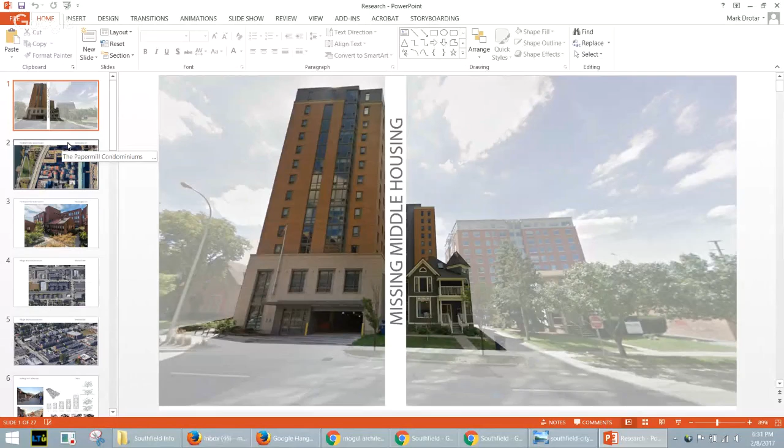I don't even know really where to start, but I guess kind of recapping some of the other stuff I've done. I was trying to put stuff together for Monday, to really organize my thoughts, because I feel like I've been all over the place.

I enjoy your modesty, and I love the soft sell you create for yourself. But Mark, you're actually a pretty clear thinker. I think you have that more Southern way of talking, slow and engaging in terms of cadence, but your thoughts are actually very intelligent. They have a lot of pulp to them, a lot of humanity to them. So if that gives you a little more self-assurance, maybe that's the aim. But I also enjoy listening to you talk about your work, so I don't mind the confusion, but you can't hide behind that forever.

No, and that's where I feel like I'm a slow starter. Yeah, me too, quite honestly, I'm the same way. Because I've seen your work - that's one of the things I valued about inviting you all to talk about your work, and you had a lovely project last year. So that kind of coherence and organization is what I expect from you now.

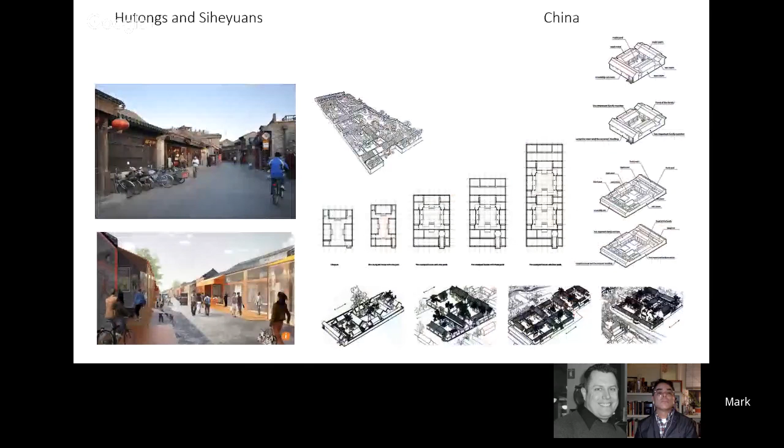From last week, some of the things I looked at were the Papermill Condominiums in Washington, D.C., Village Drive condominiums in Dearborn, and the Hutongs and Siheyuan in China. Good stuff there.

It got me thinking, both with Dearborn and with these, about the use - who's actually going to use these things. And I started to steer towards, in my mind, families in a sense. That's kind of what was in my mind as I was doing this last week.

Just to give you some location, it's in Southfield, located between the 696 and the Lodge Freeway, that corner. Just some aerial shots.

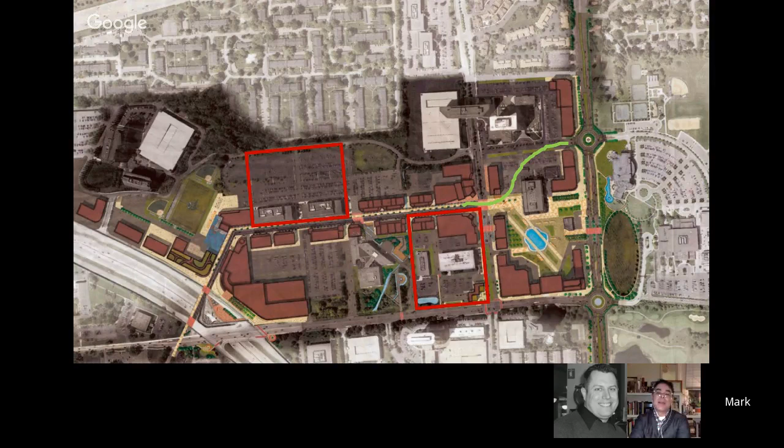Exactly, that's actually why I think this layout was interesting and compelling when it was done. But the whole sensibility, the current best practices about urban planning strategies in neighborhoods like this has changed, and that's why this will never go.

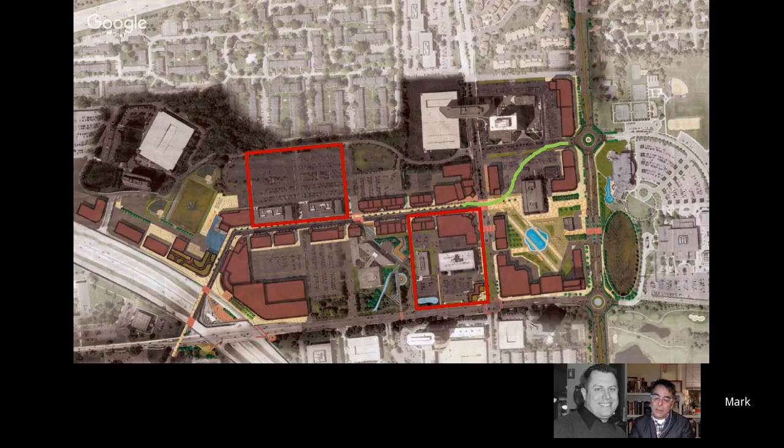Well, I don't mean to derail the conversation, but now I'm thinking of, I'm going to say Dearborn again, but not the neighborhood we visited, and maybe not Dearborn at all, but maybe Southfield. And I'm saying this because of your remark about maybe I'm not doing a design at all, which on point is interesting to me, because maybe you're right.

Maybe it's actually, maybe you actually craft a prism through which the content of this polyfamily is projected through, and the colors of that content are configured on that block that you have in Constance's plan.

And then you get a different prism, and you shine that content of the polyfamily into a current neighborhood somewhere in Southfield, and start to look at what you would have to do to those single family houses, the driveways, the garages, in a way to recast those products of obvious suburbanism and suburbia, and make them something that could accommodate the polyfamily, in such a way that two sisters or a brother and sister could live next door to each other.

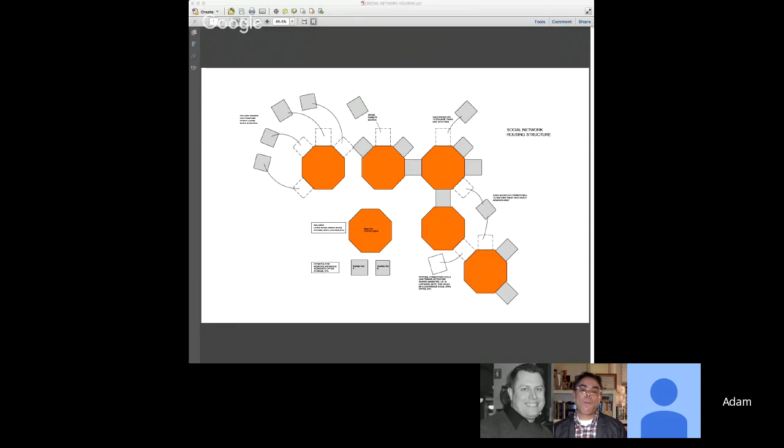Then I started to think about how, if you want to work vertically with this, it might begin to become a challenge to detach those different units if you were a second story up from there. So you need some kind of secondary structure.

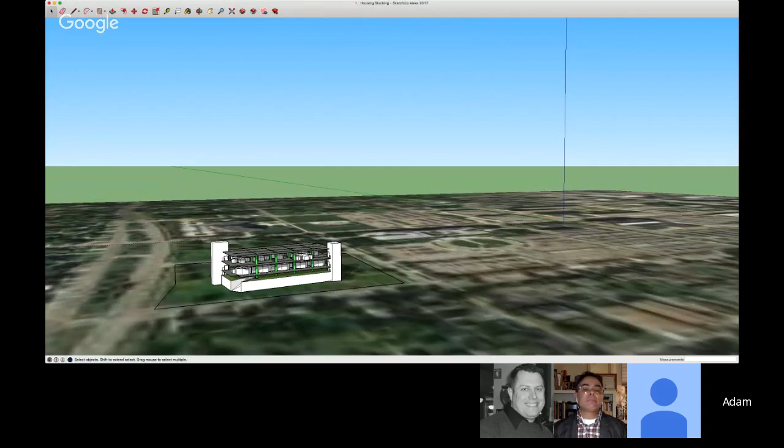I was looking at—just gotta adjust my screen one second—Corbusier's Dom-ino, or the Dom-ino house.

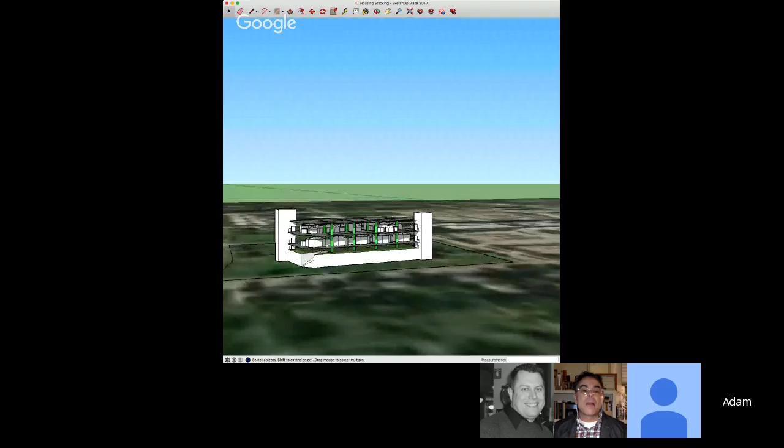Creating the free plan, like a carriage house and Unité d'Habitation with the common roofscape and different shared amenities between all the sites.

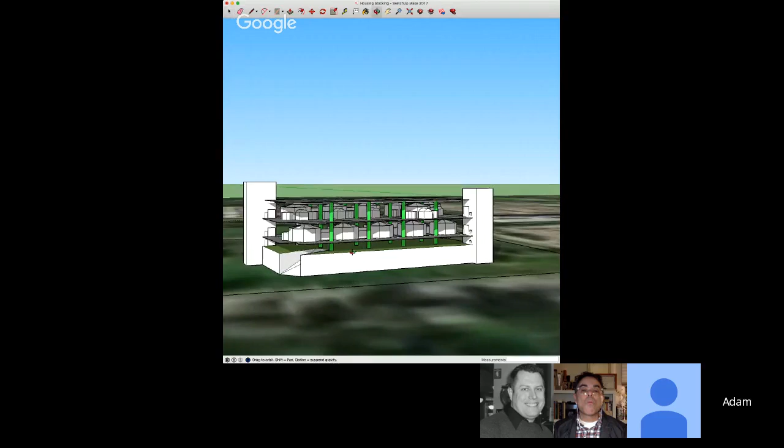So then if each layer becomes—you sort of create a scaffolding with that, so that at different levels you can begin to start plugging into the common utilities shared between all of them.

And then that scaffolding, the sort of—what do you call it—metal decking that you'd see on bridges and stuff, can allow that to be transparent, so you can still get light coming through and airflow still being maintained, rather than just like a concrete slab, a parking deck.

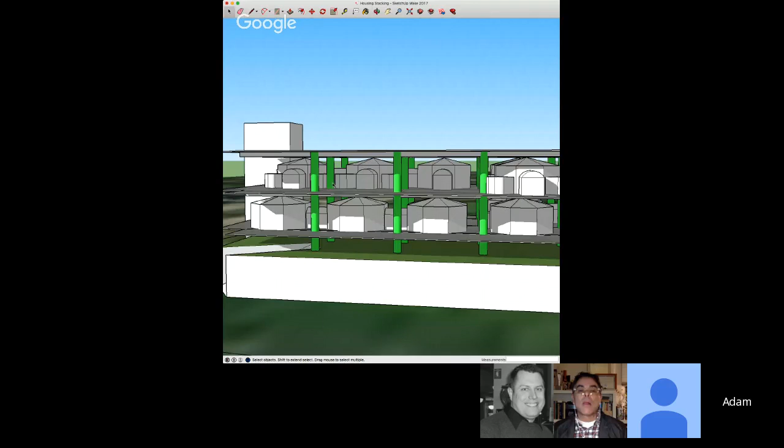But it does have the DNA of a parking deck, which is interesting, isn't it? Yeah, so that way people can park their units within this overall structure. And let's say you wanted to detach a unit—you could disassemble it, transport it down the freight elevator, and then reassemble it down below.

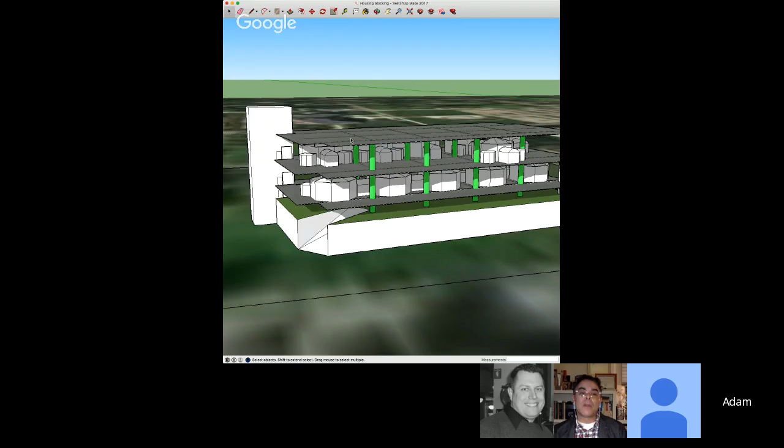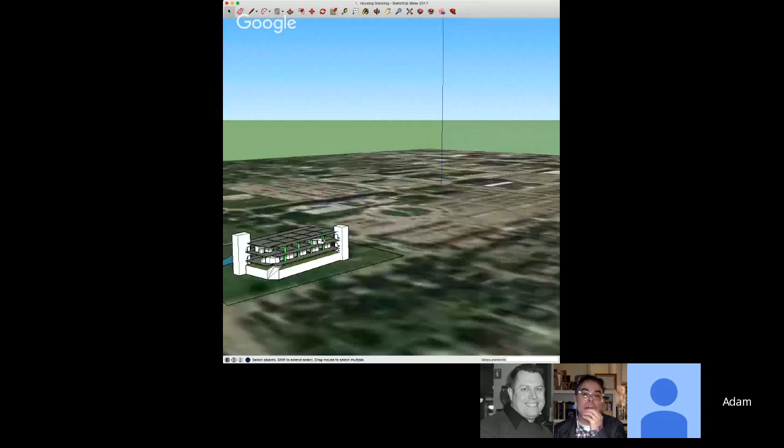Then I thought a little bit about how it'd sit on that site, using the southern fully open site. I didn't want to completely block off walking from the neighborhoods to the west to this historical museum, so I thought there could be a grand ramp coming up onto this second level, nicely landscaped, and a bridge coming down across the other side, connecting it over towards the museum to the northeast.

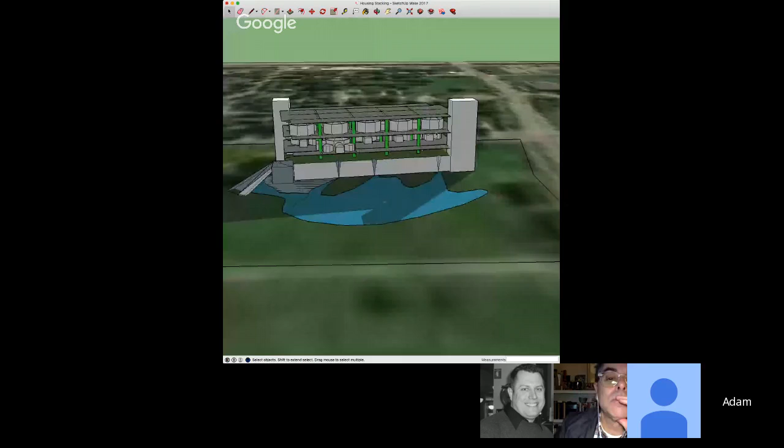Since this metal deck would have openings, water could start to drain through into the landscape area below and off the sides of the building into a sort of detention pond, to help store water on site and take care of the runoff.

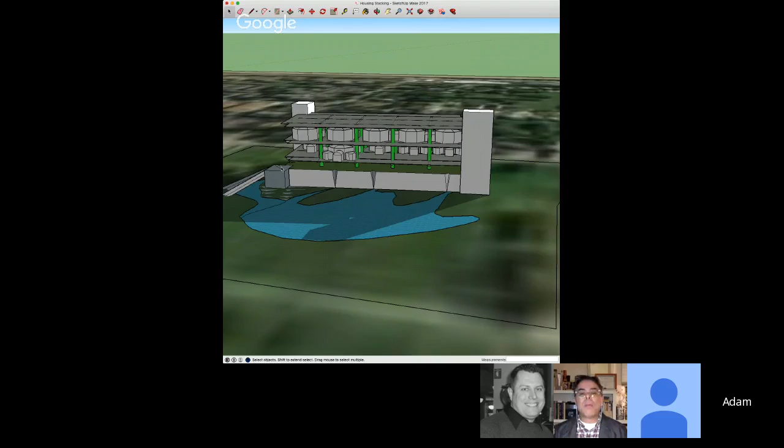So is this one unit deep, with public space on the back and front of each unit? Can we look at the plan of this thing? Maybe take the roof off. Oh, so maybe not—or no, it's two units deep, but I could adjust that to whatever it would need to be. I'm just trying to understand that.

So I'm looking at this thing and I think the genetics of the model are causing me to react to it urbanistically. Hear me out, because first of all I'm kind of intrigued with this thing—it's quirky and it's innovative. I've never seen anything like this, and yet, given the nod to the habitation units you've seen by Corbusier, by Corbu, it's all really, really interesting.

So I don't want to quash that idea, but like the Unité, right? The habitation units were bad urbanistically. So that's what you got to brace yourself for.

The first thing I'd say is that by putting this thing at an angle on the site, in the middle of the block, it doesn't really allow for things to be built up next to it, and it doesn't really help define the street more. You shouldn't be surprised about that. That's kind of baseline urbanism - hold to the street wall, make things normal in that sense. If it's on the corner, take advantage of the corner. If it's in the middle of the block, then it's maybe a little bit more modest. Those are the rules of the game.

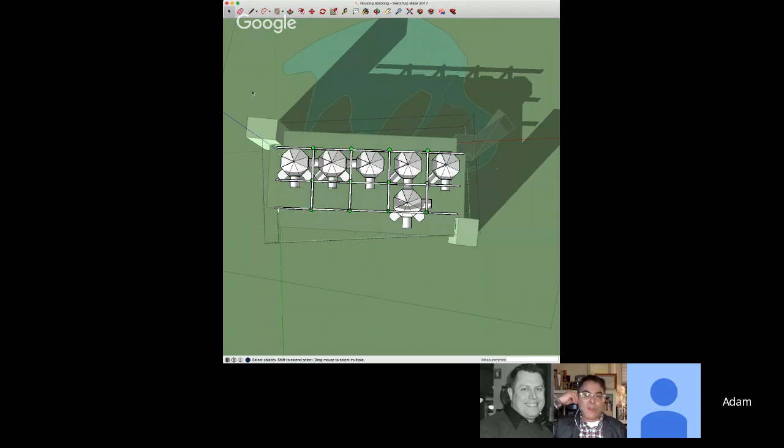Also, I think the thing could be much longer and could have its own configuration, like it could be L-shaped or T-shaped, and therefore be much larger than what you've shown. I don't know if you've thought about it urbanistically or programmatically to that extent, but that's probably coming next. And then it could fill up the whole block, or it could be a giant donut, and fill up the block.

And then the courtyard space in the middle could be a pond that everyone who lives there would enjoy. So if you thought about this thing as a digit, or like the bones in your spine, and you somehow took the model of that spine and just kinked it and kinked it and closed it onto that site, you would have that spine wrapping around all 4 streets, creating a courtyard.

Or maybe it's C-shaped, where the 2 legs run parallel to Martin Luther King, and then the other street - I can't remember what that was right now - it's open along, what is that, Kalamazoo? You know what I mean? So that's like another possible iteration.

So before you get too detailed in the architecture of this ark - because that's what it is, sort of - maybe just go back and think about density and urbanism as an opportunity to help unite this new thing into the neighborhood as responsibly as you can, based on your own experience with urban design strategies and based on what we're talking about tonight.

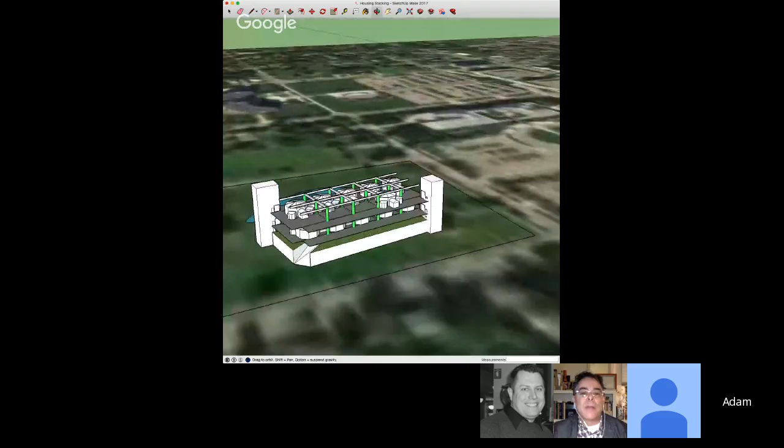The reason why the first floor was raised up was that maybe that first floor could start to either become - maybe there'd be some sort of live work opportunities going on here, or maybe you'd be able to provide some parking there. So this whole thing could be retail. Yeah.

So it's kind of a quirky thing in terms of maybe the way it looks, but it's also kind of familiar in terms of the way you're breathing life into it.

And I'm wondering if it makes sense for you to look at the piece by Corbu in Marseille, the Unité d'Habitation. Maybe look at the section of it, look at a typical plan, and look at the ground floor plan, look at the roof plan, because those elements are what makes that building important.

Also, kind of your idea of like, Billy's moving out, right? And so he's gonna pull the mini room in on a trailer to Kalamazoo College, and he's gonna plug it in there, for example.

That's cool. When you look at some of the design drawings, Adam, of the Unité, you're going to see Corbu talk about the Unité as a wine rack, where each apartment is kind of like a wine bottle - a vessel for living in.

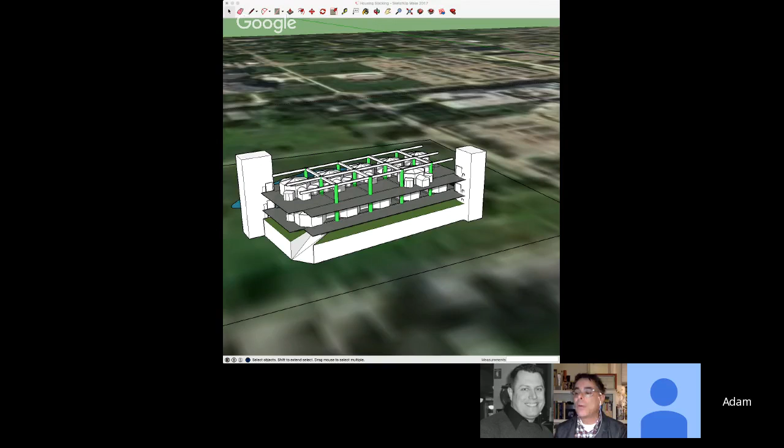But they're socialist housing, government housing, you have to know that, but they're very interesting. So going back to where's the architecture - can you close this for a second and open up your browser and type in, have you been to Paris? I've been to the airport, but no. Okay, that's a great airport, by the way. Yeah, it was pretty cool.

Save that, and then quit. And type in Pompidou Center. This is by Renzo Piano.

I think I got it. Maybe we can screen share that. You know this building? Recognize the name. Yeah, go ahead and click that article. So this is a collaboration in like 1969 by Renzo Piano and Sir Richard Rogers. This is a museum, okay.

Let's scroll through these. That's the Maison Domino plan, right, that open floor. And then the infrastructure is actually on the exterior. And the aesthetic is obviously playful, mechanical, but celebrated, right? The roof - and so you see it's this structural steel kind of vessel that allows for the transformation of interior spaces into multiple exhibit scenarios.

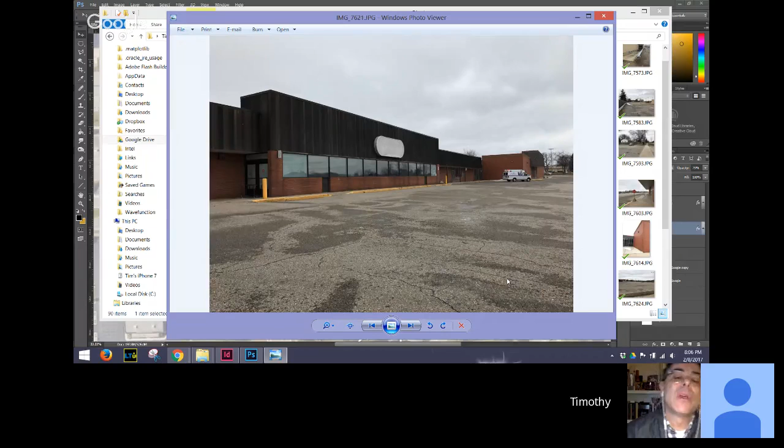I want to take you to a thing I did - not that what I did is good, although I definitely want to see your drawings. Go to West Bloomfield, Maple and Orchard Lake. Yeah, that's a good one. You saw the way we opened up the old Farmer Jack - was that the Plum Market one? Yeah, and made it a Plum Market, and we made it smaller, and we added retail onto it. So you're totally down with that.

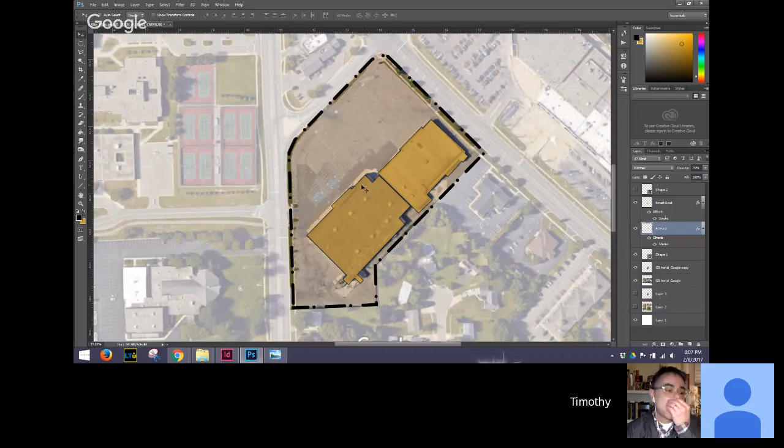Just to get my concept of operations, I guess. I've been looking at the numbers, playing with unit sizes, basically working in my sketchbook right now. The idea would be to program this in a way that part of it becomes for the community, part of it becomes the housing, and part of it becomes the program for the veterans. So I would end up doing something on the first floor, probably part of the Kmart, for the veteran services.

And then, it's shorter than I thought it was too - it's only about 16 foot to the top of the roof deck. But they have some tall parapets and mansards that make it look taller, to hide the RTUs. So being only 16 foot tall, I thought I might be able to sneak units inside, but I don't think so, so it'd be tough. You mean like a mezzanine? Yeah, right. So I think I'm going to end up having to try to build a number of units on the roof.

You could do that too. Of 20 to 30 units is what I'm thinking. Have you drawn that up, have you laid that out? Not in the computer, no. I'm playing with a number of different typologies in my sketchbook.

A couple other things I wanted to show you - I did a lot of digging over the last weekend of typologies for big box reuse. It's actually quite a huge issue, and becoming a bigger issue, these vacant big boxes. What's happening across the country is the Walmarts, the Kmarts, all these places are abandoning their stores wherever they are and leapfrogging over those to the next sprawling area, rebuilding and abandoning the old one because it's cheap.

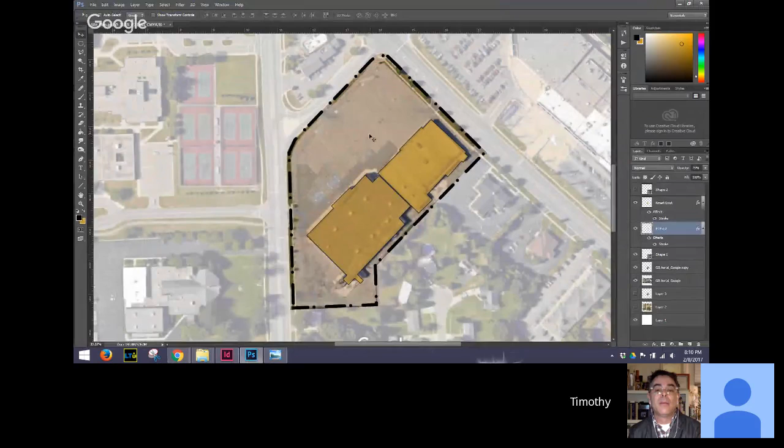Going back to my site plan, on my initial concept for the COAD assignment, I was looking at this, very roughly. The more I looked at the typologies for repairing this urban sprawl damage, the more I came across trying to take these parking lots and rehabilitate them to line the street fronts, kind of like what you did on the Plum Market site where you had the buildings at the corner with retail. So I was hoping to program that into the overall master plan, even though I may not develop it.

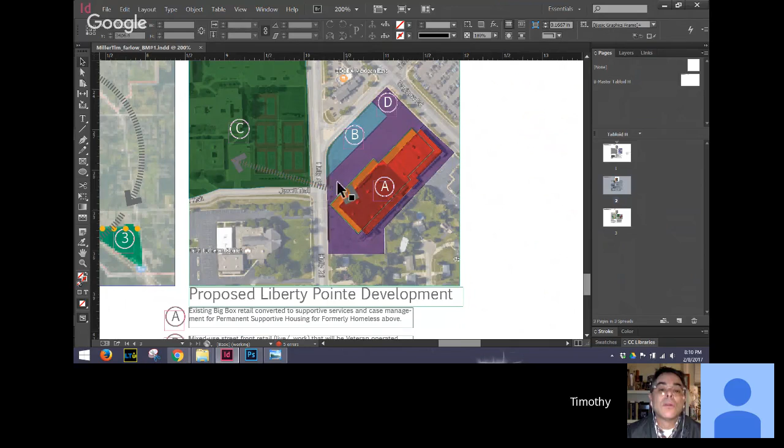So what is B? Is that a mixed-use building? Yes, it would be mixed-use street retail, live-work possibly, or something along those lines. It could have, in effect, two fronts—one on the diagonal street and one facing the Kmart.

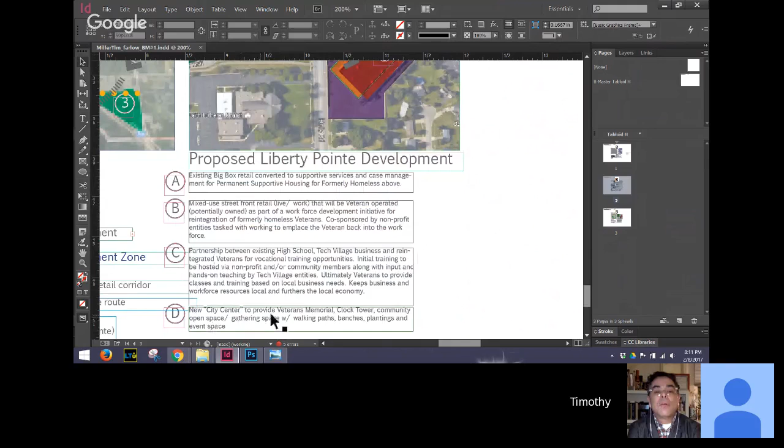What's D? I was looking at it being part of more of a community city center. Could be like a jewel box? Yeah, a clock tower—something highly visible, potentially iconographic. What's kind of funny is, if you look at this, I took some photos of downtown too, and this is kind of what our current downtown center is. Nothing crazy—this right here is our city center clock tower. I would like to take this and essentially move it to that corner and develop that corner better.

Ellen Dunham Jones talks about how some malls and strip centers are becoming the new town squares. Yeah, I watched her TED Talk after you recommended it last time, and it really inspired me how she talked about a shopping mall that was turned into an artist's studio. She talked about how some are being developed into this, some into that.

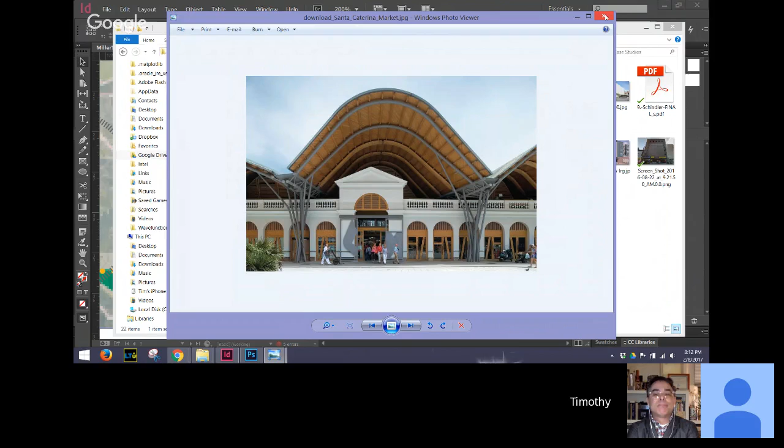That got me searching around, and I found a bunch of different case studies talking about turning malls into a market. This was one of those—this is Enric Miralles. I think it's in Barcelona, but this is amazing, I really thought it was cool. One of the other ones I thought was really, really neat—that was the one you showed me.

Randy Brown, adaptive reuse—this one absolutely blew my mind. Looking at this, you're like, wow, this is a really cool library. Well, it started off as a Walmart. Seriously, it's in McAllen, Texas. It started off as a vacant Walmart—that's what it looked like. Here's a construction photo, and here's that entrance after it was developed.

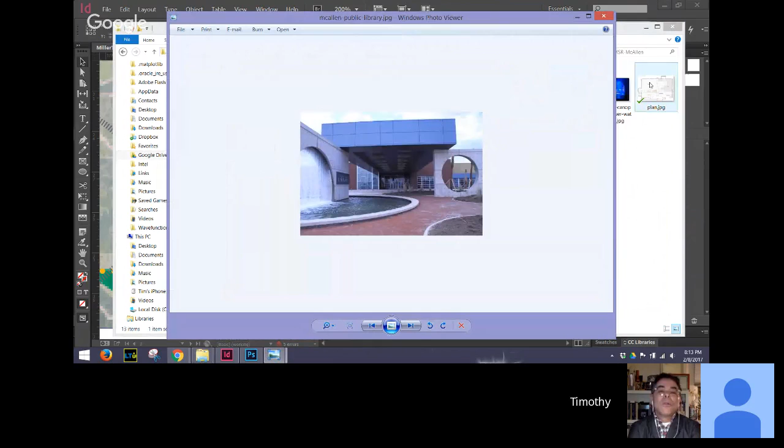So let's go to Google Earth to McAllen, Texas, right now. This is the way I like to work—look at it, take a screenshot, bring it into AutoCAD at the scale of your site, and test it. What did they do? Apply the case study.

That makes perfect sense. I'm with you. So there it is—I can still see the old parking lot, I can still see the loading dock. Let me open this real quick—so that's the plan.

Their issue, from what I read in the case study, was that Walmart has these really, really tall ceilings, and they had to figure out how to program this into a library in a one-story space—which actually ends up being the largest one-story library in the U.S. They had to bring down the ceiling, bring down the spaces, to make it look like a library and not a converted Walmart.

That's easy, though, I think. I think that's a fun challenge. It was, and it came out really, really cool.

If you just look at the DNA of this site, it's got outlots - the PCS dealer, Cricket Wireless, and the burger joint. It's got the parking lot, which has been reduced because the load is different, and it's privileged some of that reduction to community space. It's tried to connect it with the neighborhood by walking paths. It looks better in the pictures than it does in the aerial - in the aerial, it still smells like a Walmart or whatever it was. But yeah, this is what we're talking about.

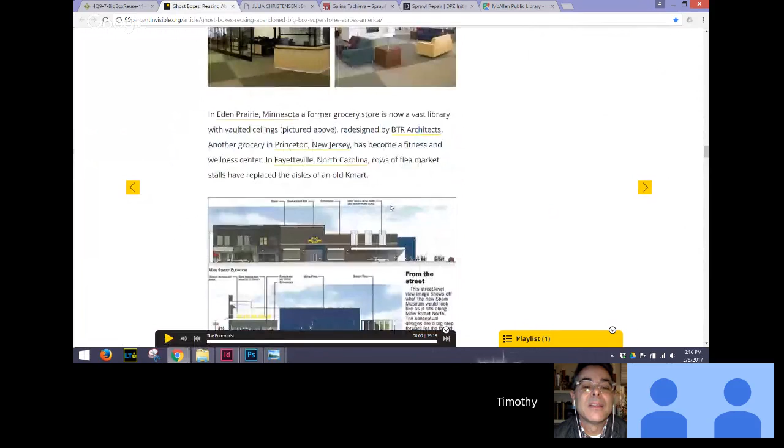Austin, Minnesota - they transformed a former Walmart into the Hormel Spam Museum, which is kind of interesting.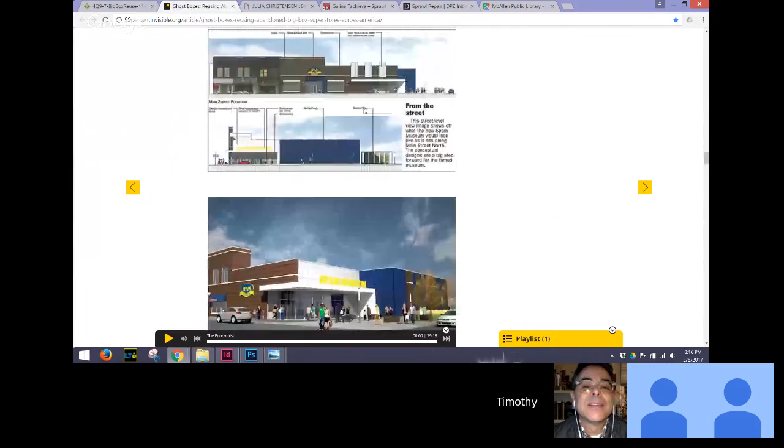There's another one that they transformed into an indoor go-kart arena - nothing special, but it's interesting. Yeah, a family center. So I started looking at a lot of this, and it's really given me a lot of hope.

This is what we were talking about last time - you had the big box on the left. What I said when I showed you the Lake Flato stuff was that maybe you cut things open, maybe you rip the roof off, maybe you peel back the skin, and end up producing something that's actually the aggregate of lots of small things that don't belie the genetics, the heritage of the original big box. That's a perfect section drawing down below.

That one really hit me too - it really started making me think when I did my site study. When I walked out there, there's a couple different points on the building that would allow you to cut through the backside, like here. This would allow you to cut a swath through the building to create sort of this community space walkway. And then it actually links up to the front in this area right here where the former garden department used to be, so it makes a lot of sense.

You could do something along the lines of stripping this canopy down to the bare steel and doing some... or rip it off. Or do something completely different. Maybe you leave the steel and it becomes part of this.

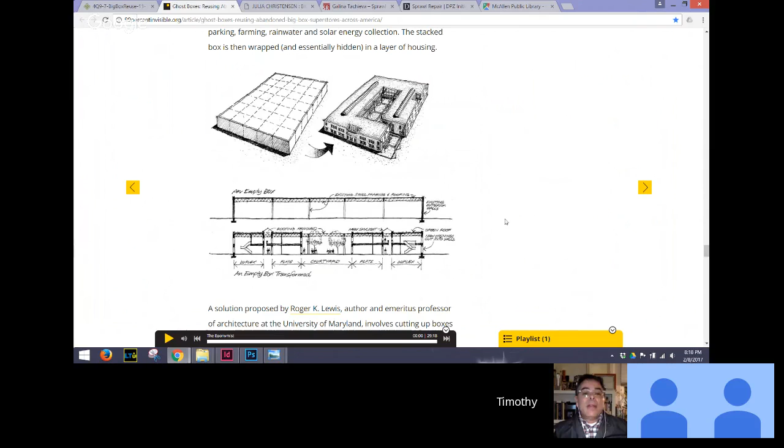I think what you have to feel comfortable with is using the steel and the footprint, but don't be limited by any of those. You don't even have to be limited by the roof - the roof can be cut and the steel can be extended up to create higher volume spaces, like where those skylights are. They just cut holes in the roof, but what if you extended walls up to make a much larger volume, bigger than the skylight itself? Like what if that courtyard roof where you see the trusses - you could leave the trusses there, but extend walls like clerestory walls up above that and have architecture and spaces there as well, looking into that courtyard. So don't be limited by anything other than where the columns are, and you can still work with that.

I would agree. I appreciate it. So I started more and more - look at that, that's an interesting drawing.

This girl - I don't know if you're familiar with her, Galina Tachieva - she's got this idea of sprawl repair, she calls it. She's worked with a firm, DPZ Architects - that's Duany Plater-Zyberk, Andrés Duany's firm. I started looking at their work, and he's the guy I told you to listen to his 10 lectures from the AIA conference down in San Antonio - it gives you the entire history of urban form.

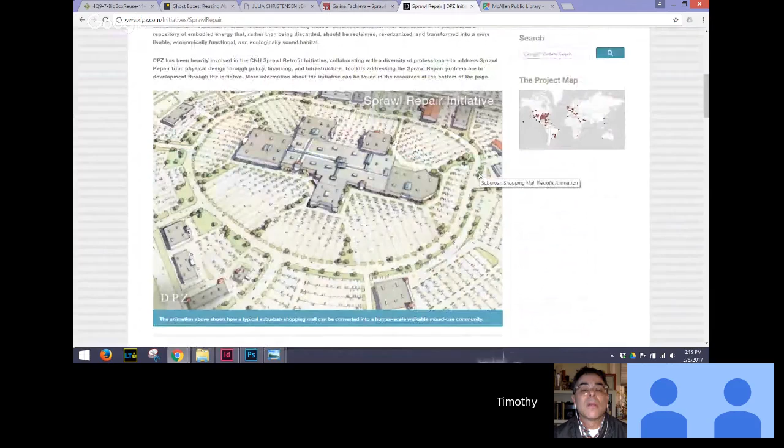Okay, so that's a great pair of drawings. He has a bunch of them. And it's funny, they classify it as many different things. They have the shopping mall. How do you transform the shopping mall? It transforms into something like that. I had a student from Columbus that took on one of these and tried that.

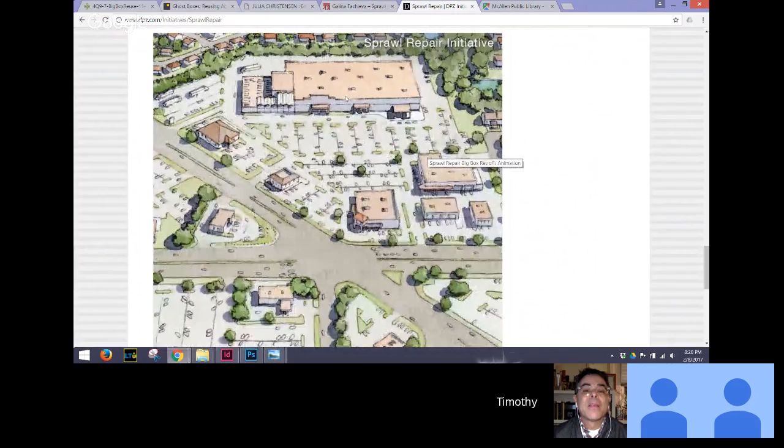Okay, so this is your condition. Yes, exactly. So that's where I was getting at, maybe I can program from a site master plan standpoint, something along the road to help reduce the parking and bring back the urbanism to this site. But then I can also start adapting the big box itself and then focus on the residential portion of the big box. Right, right. So that's kind of where I've been.

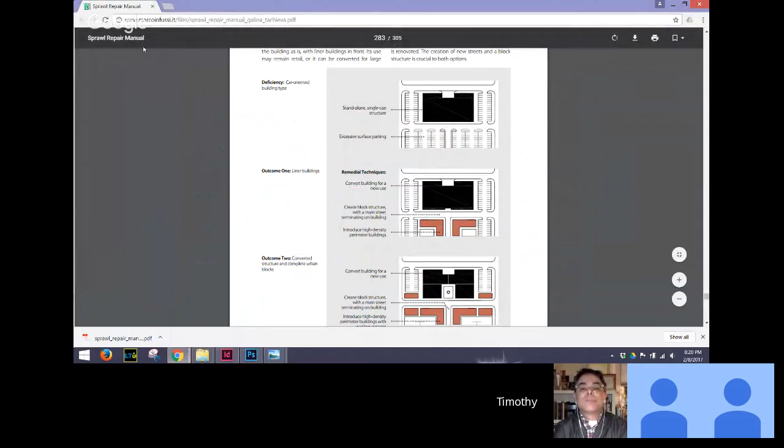So let's go back to Galina's thing there for a second. Oh yeah, let's look at this too. So I downloaded her Sprawl Repair Manual, she calls it. And she goes through the different case studies where you can repair sprawl on the regional level, the neighborhood, the big box, the building level. So this is just some of her typologies and suggestions for the big box repair.

Yeah, so you're kind of a blend between outcome 1 and outcome 2. Right, that's right, exactly.

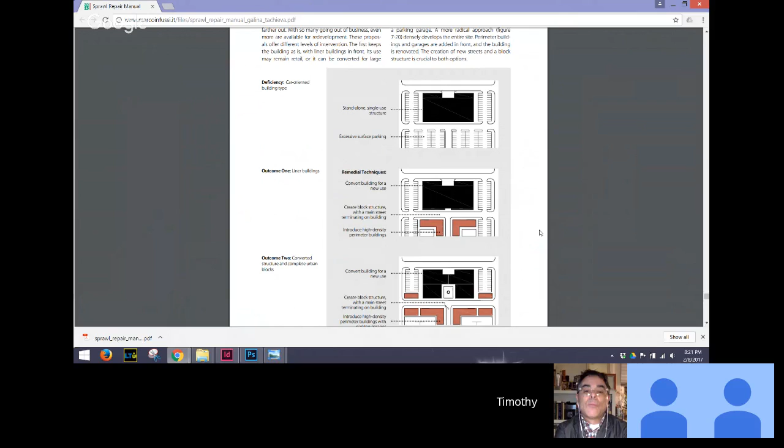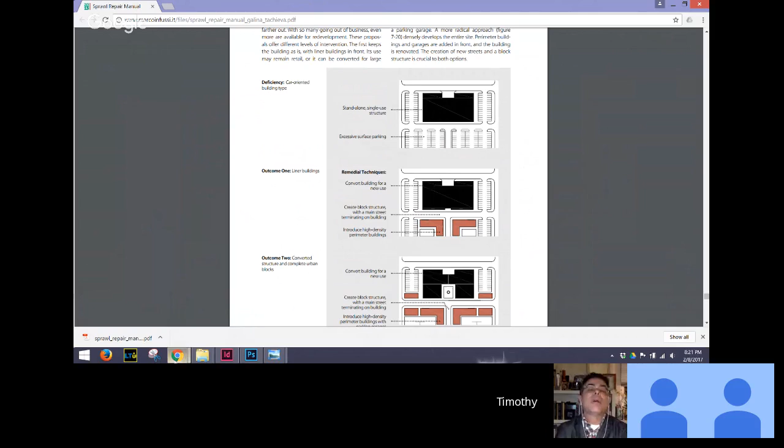Yep, but I think you need to have these drawings in your presentation. You need to make them part of, like, what you need to teach us about this. Even if it's her work, you need to teach us about this stuff. Can you show me, do you have her strip center stuff?

That's why I like the inclusion of an Aldi's or something like that into your program here. Okay.

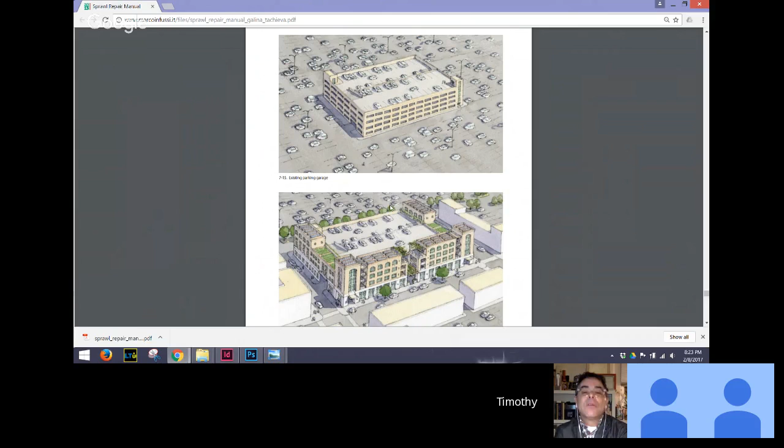Right, so just let me see the rest of these, please. Yes, this was like a gas station outlet. Oh God, yeah. A drive-through. Yeah, that's a McDonald's, right? Right, or Burger King or Denny's or whatever.

But here's the thing, right? The space between the new building and the Denny's is really kind of cool. Yes, it actually is, it's like a sub-street. And it promotes walkability. Right, pedestrianization. Yeah, it's all good stuff.

This is the guy that started it all. Okay, now that you mentioned that, it's ringing a bell. Andres Duany. Yep, I have it right here, I wrote it down. And that's one of the guys I had not looked at yet. And his wife is Liz Plater-Zyberk. Okay, that's why it's DPZ, Plater-Zyberk. So she's one of the staff planners or one of the staff architects then?

Staff urbanists. Galina worked with them for a number of years, and then she developed this Sprawl Repair Manual with their assistance. Yeah, and put out the book called the Sprawl Repair Manual, basically. Nice, is it a book I buy or is it a PDF?

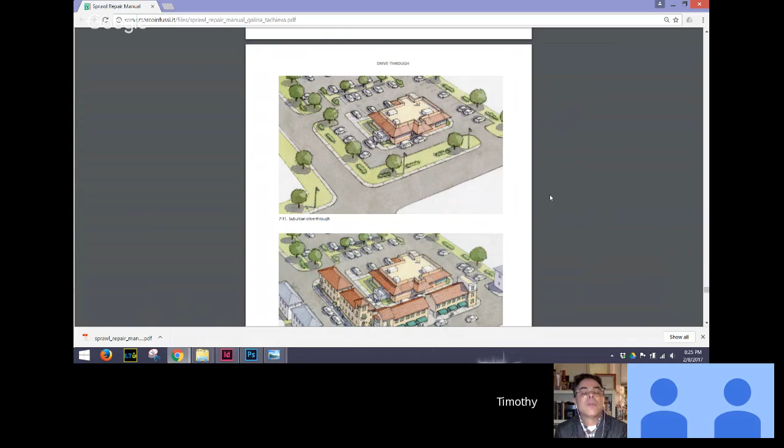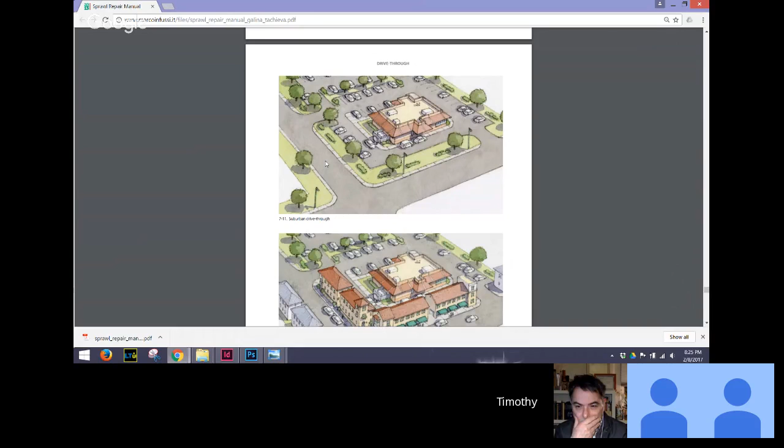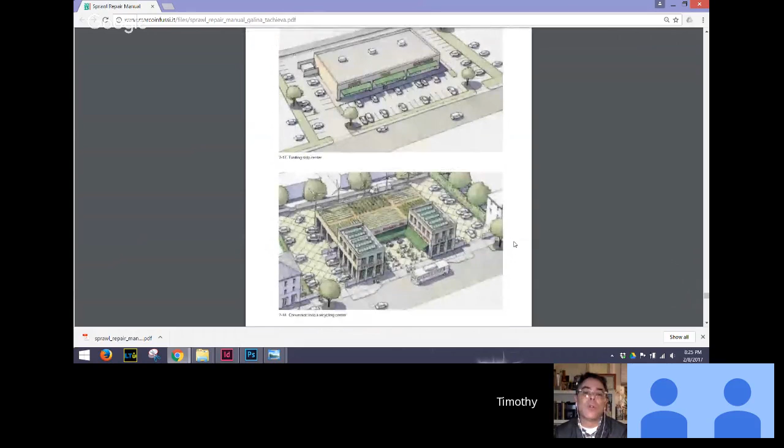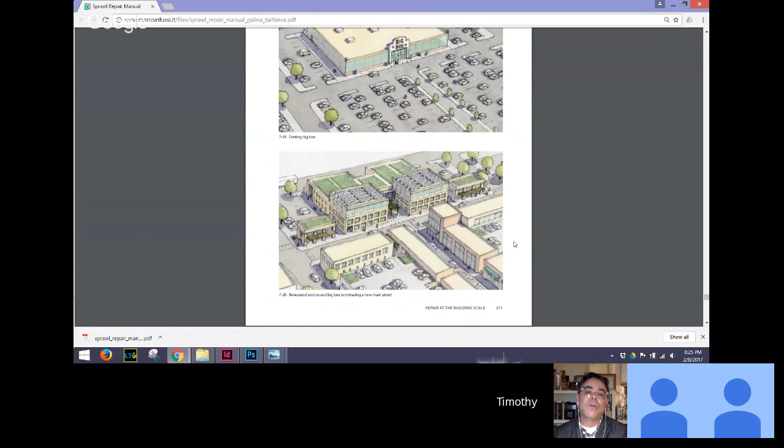Unconsciously, or maybe consciously, the name stuck in my head, and I've really delved in and I like a lot of what they're developing. It makes sense, this is the appeal of new urbanist theories. The disdain for new urbanist theory is that it all looks like this, and they don't really think of how architecture can improve this stuff.

Let me show you an example of what I mean. Just scroll through it. Yeah, it ends up looking kind of postmodern.

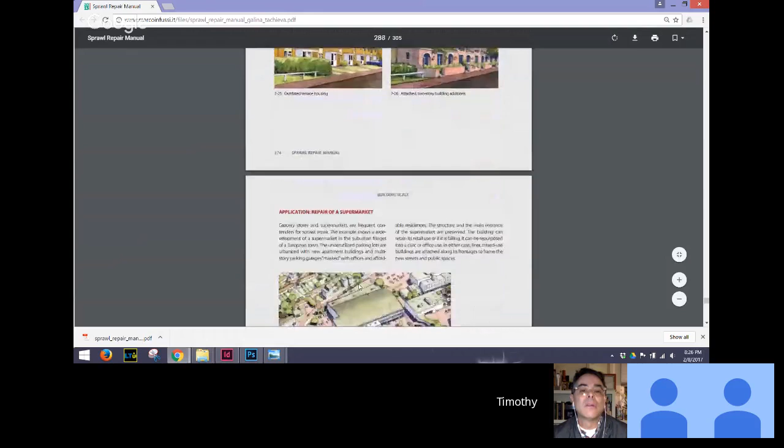That's a big PDF, isn't it? Yes, it was, I was really surprised. I wonder if this was her thesis for school.

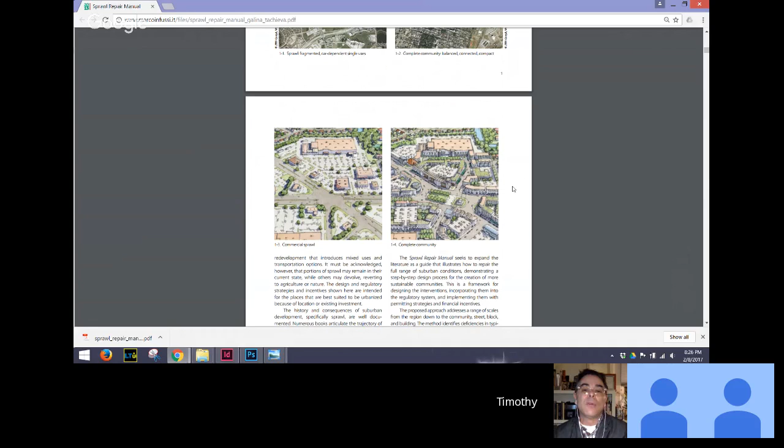Well, this one's spot on. God, even the diagonal road, that's just crazy. But I like the way that she intersected it, and kind of diverted. Yeah, well, that's what we talked about earlier, you know, the work goes beyond the footprint of the site boundary.

Very cool. Okay, green light. Okay.

Look at this, in 5 weeks, look how far you've come, Tim, just in your sensibility about what can happen in your community, looking at something no one else wants to look at. And you've learned some things along the way about how other people are doing it. The wisdom that has been afforded them is something you can withdraw from that wisdom bank and apply to your circumstance. And when you make that fund transfer, that's where you as the creative come in, and you'll end up making something special and unique to that site.

Okay, good. What else do we want to go over? Don't forget to send me your write-up. Oh, I did send it. Did you say I needed to trim it, or did you say you would trim it? Yeah, I'll trim it, if you could cut it by 25%, that would be helpful. So that was my mistake, my communication. Well, I probably didn't communicate it effectively either. I said I was going to have to trim it.

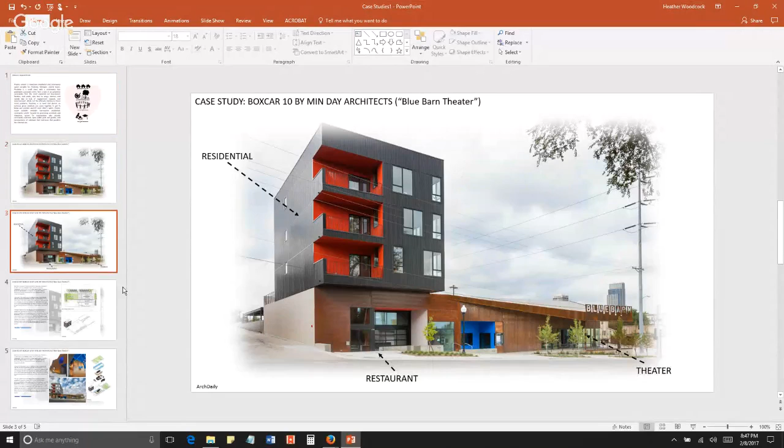I'm trying to condense it down. It's the perfect size. Okay. And then I looked further into the boxcar. So you modified these images a little bit, didn't you? Slightly. Yeah, I like what you did. Oh, nice.

And then I tried to find information and find sections and find elevations, but it's very hard to find this stuff. Did you call them? I did not call them, no. I wouldn't dissuade you from doing that. Okay, I keep complimenting you on this, but I am really impressed with how you organize and portray information.

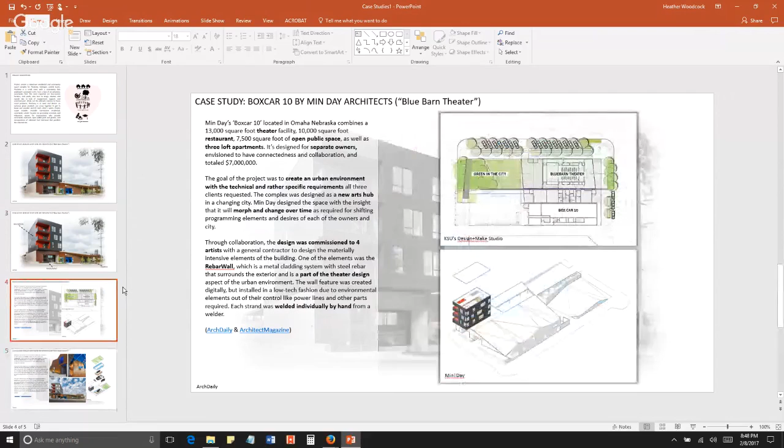Because I was sick over the weekend, I didn't have a whole lot done. It's like all in my head right now. I just have to put it down.

What I found interesting was their rebar, how they had to weld it individually by hand because of power lines and site conditions. Those are everyday situations and problems that you don't realize until you actually go out and build it, or deal with it as an architect and a contractor, and the dance you have to do to make the idea happen.

That's very good. And the design was also commissioned to four artists. There were four different people that worked on the facades of these buildings, which were owned by multiple owners. It's a mixed-use building with mixed owners, which gets complicated. Yeah, it's definitely a complex building.

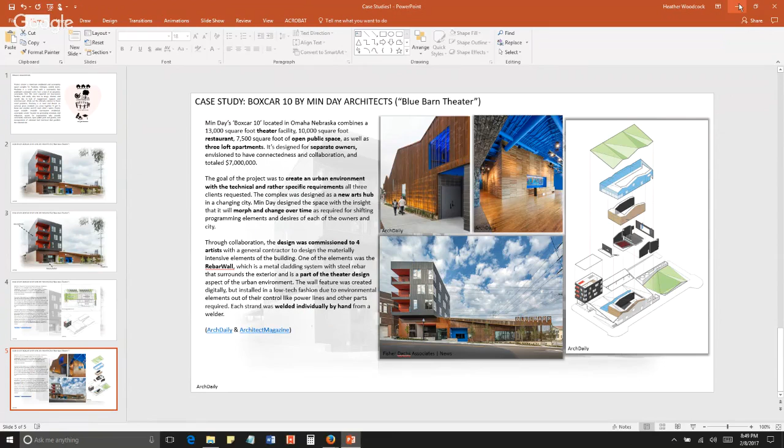Can you show me this building on Google Earth? I can do Google. Go to Blue Barn Theater, Omaha, Nebraska. Pull up the map and get to the satellite view.

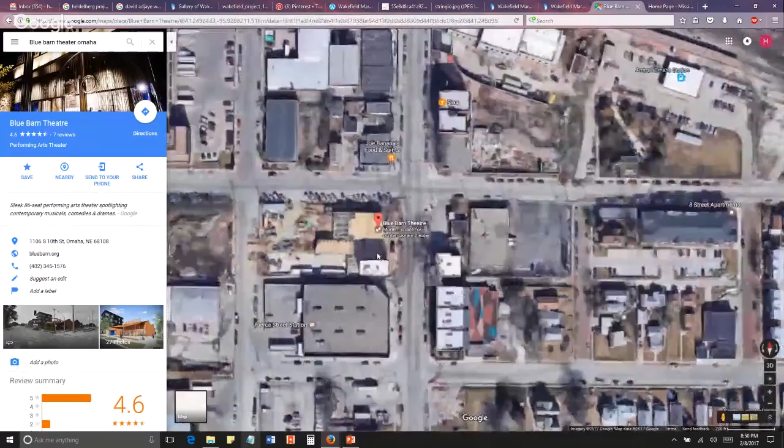Zoom in, please. Something's under construction here, but you can see where the tower is, and you can see where the theater is going. Nice, and you've got cars on it, so you know how big things are.

So here's what I would do to complete this really lovely case study discussion that you're leading: I would copy that image, drop it into CAD or onto your site, and scale it up or down to the scale of your site, and show us what this piece looks like on your site, just as a compare and contrast.

Always bring it back to your work, just so you understand the strategy. You're going to find that this is much smaller than your site. It looks like that tiny little strip I showed you in the beginning—it looks like two of those.

And when I was saying last time that maybe you ought to try to consolidate all of the program built to the hard corner at the southeast corner, I think this probably fits in that corner, for example. So that's what we're thinking about.

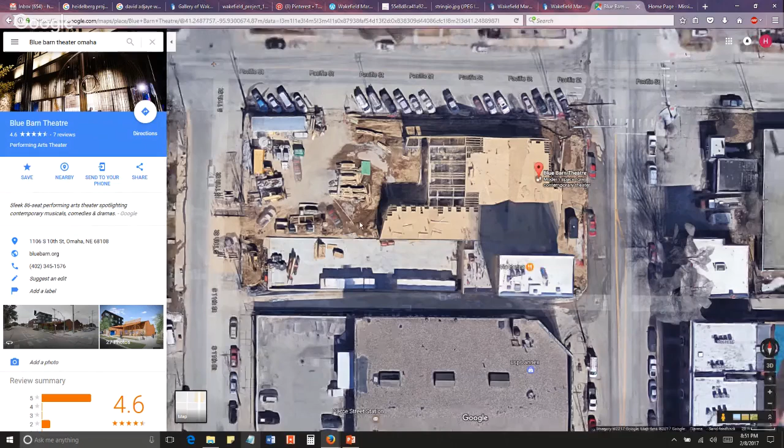Do you have it? Can you go to Street View? Sometimes Street Views are more current than the aerials, since the aerials are satellites. You might be able to see it.

Where are you? It's right there. See what I mean? Sometimes Street Views are a lot more contemporary, and you can do things like count parking spaces—know that they're nine feet wide, for example—and measure things. You can measure things in Google Earth, snap measurements to them, and understand the sort of scale of things.

Imagine that that's your hard corner, and the spaces to the right are near the trail—the rail trail, that sort of grassy, lawny thing. I think that could be very comparable in ways to yours. Yeah, I see how having it in that hard corner would be beneficial. It makes sense, right?

Have you looked at the work of Opticos, who are the people really behind the missing middle? No. Did you look any more at David Adjaye, who I think I told you about? A little bit, yeah. Okay, good.

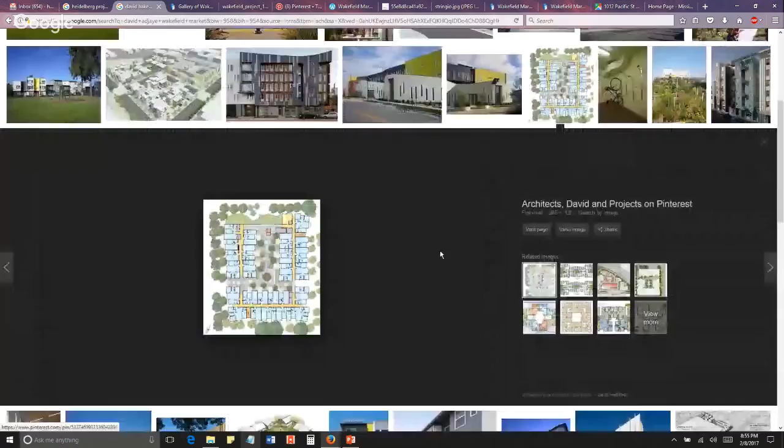Tassafaronga, I think - okay, so this is a small community. See the third row, the aerial drawing, and then the one three or four right of it, the site plan. Let's click on that one first. Oh, that's the small one, let's go back to the aerial. It looked bigger, I think. Yeah, so this is kind of the scale of your thing, but if you look at the entire development, it's actually much bigger than this.

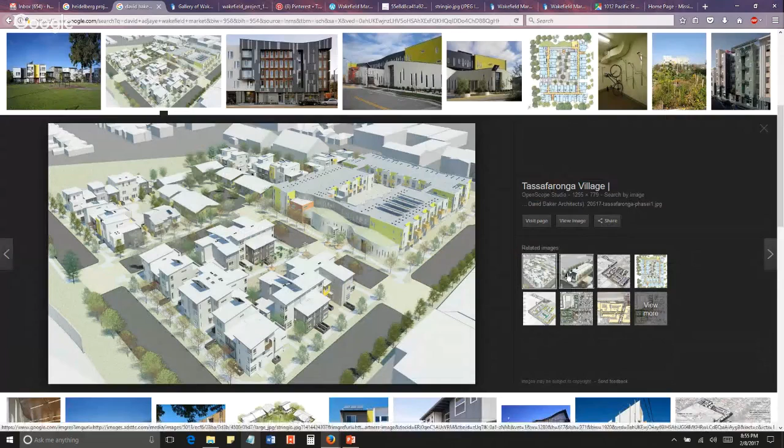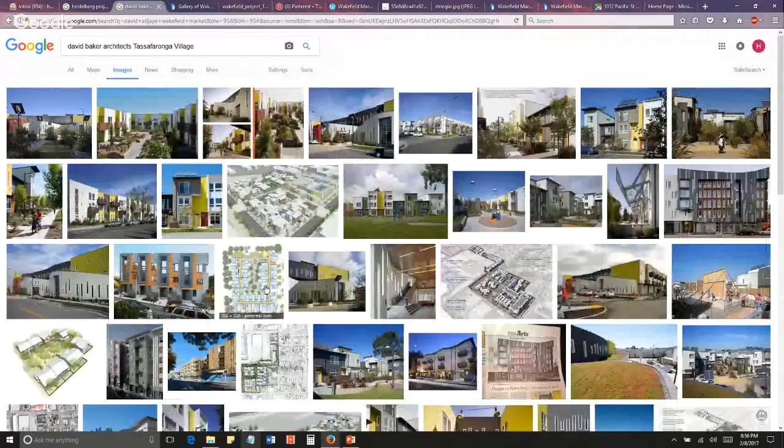And it's also pretty varied. Do you see? Click the map where your cursor is. You see how in that map there's really dense things where your cursor is, then it starts to break down a little bit, and then it gets to be like townhouses on that street, and then sort of individual things at the top. So there's a variety of housing types that he deploys there - 3, 4, or 5 different missing middle opportunities. There's always a commitment to high quality design and placemaking.

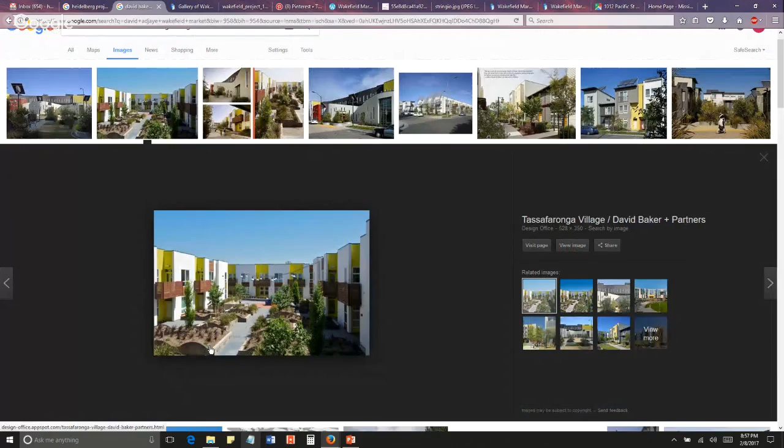So let's get out of that image and look at some of the architecture, starting with the second image on the top - the courtyard apartment. And the courtyards are actually more important than the buildings. That's something to always think about: what is the order, what's the organization, what's the message I'm trying to make with the spaces between the buildings?

Then look at the second to last image and the one before that. So this is what the street has on it - notice how it's 2- and 3-story things. They're not repeating, not the same material, not the same color. They have Romeo Juliet balconies, downspouts, solar voltaics on the roof. They have all these things that just make them unique and make living there or being there not a stigma, but actually an attraction.

Look at the one picture left of it where your cursor is. This is neat - this is a really strong project, I'd live there in a heartbeat. Look at how the scale drops way down in front of those units, and at the same time there's this little pad of green out in front of each house. I can see your whole development, Heather, having this kind of DNA, this ambiance and character.

So this is a good one. I like this one, this one's helpful for me. Good, because in Pickney we're mostly single, small - we're not like 3-4 stories, it's 2 stories max. So finding things that have 2 stories, maybe 3. I don't know the maximum height in the village of Pickney.

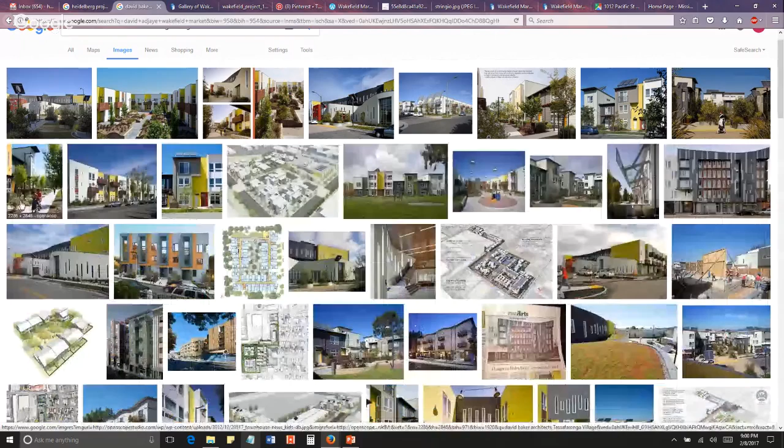So let's scroll down, I think that's a really good image. Let's just look at some of the other images - the one on the top right, with the vertical gray and white. Yeah, so this is not for your site, but it's part of the same development.

So when he does a corner thing on a hard corner, he treats it as a really special opportunity. He celebrates the corner, the silhouette, depth and texture, variety and playfulness. He does sensible things, like puts retail on the ground floor, puts balconies at nice units, does small windows because that's right for the budget, but makes the windows look larger because they have a panel below them. He makes the windows operable because everyone likes fresh air - you see what I mean? So this is a really good building, or a good development, at a number of different levels.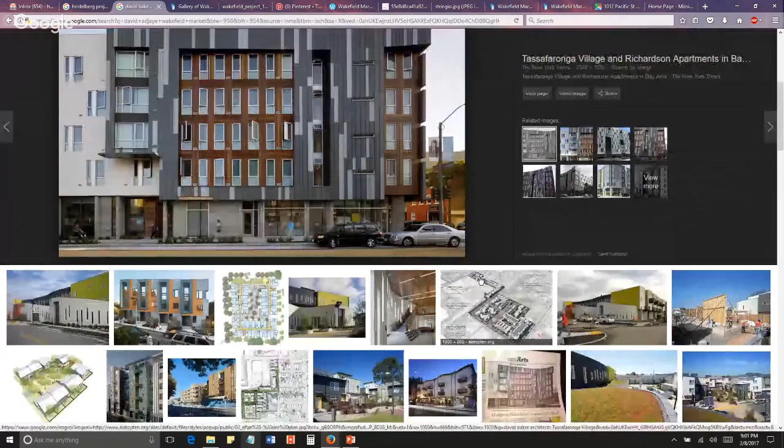Maybe if you scroll down further. Oh yeah, where your cursor is, there's a nice courtyard space there.

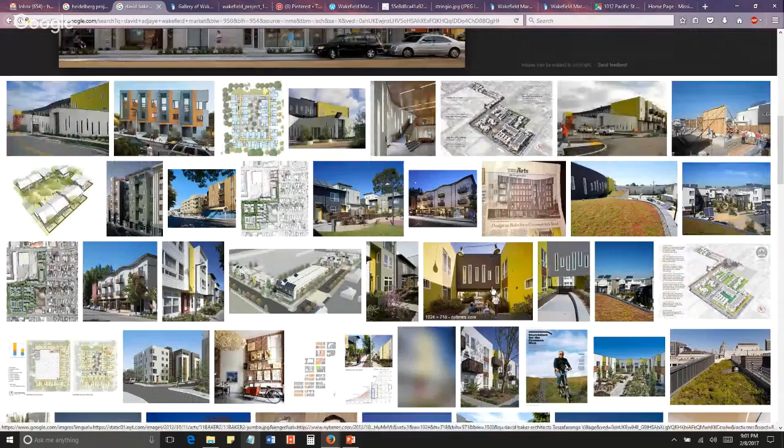So sometimes the buildings can connect. Which one? Oh, I'm sorry, yeah, the yellow one. Where's your cursor, right? Yeah, that one. How did you know I was going to say that? So like that kind of thing, right? The unit maybe isn't sitting there in that brown box, but that's clearly like a corridor.

But maybe that's not just a corridor. Maybe that's like a social room, or a study area. And it's really low, right? It maintains the scale. Actually, you see those lights that are sort of strung above.

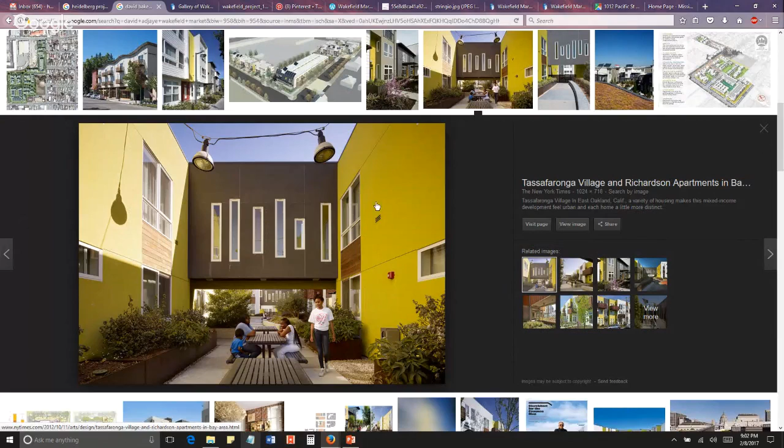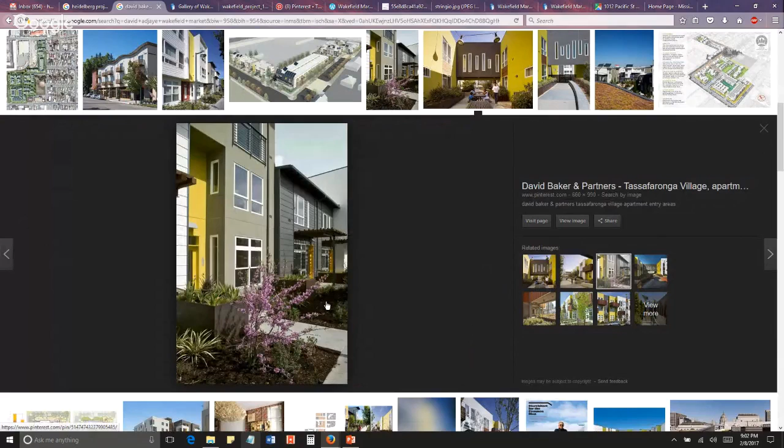There's a couple of other images that you'll see if you click on the related images in the thumbnails. Keep going, you might see them again. Yep, that's that bridge. Keep going, that's the same image if you go back. So we saw that little house with the canopy, that one from the other view, right? Yeah, and then that one's kind of like at the other end of that bridge, or maybe it's a different bridge.

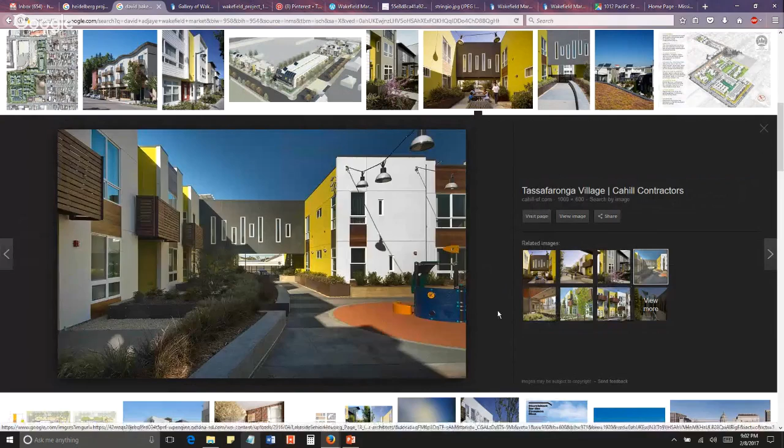But he's created kind of a neighborhood of these highly varied house types and form types in terms of height, scale, window, material, right? But the common thread is a commitment to variety, and organizing them all to the other common thread, which was the ground plane, and making that space between the buildings really, really special.

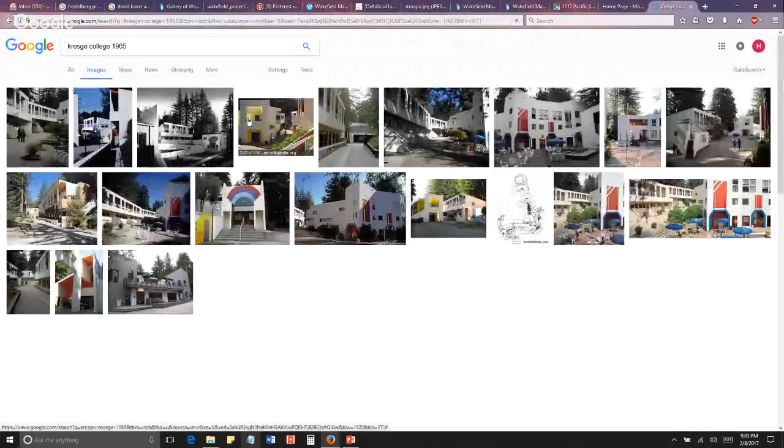Okay, now I want you to know where this came from. Type in and save this: Kresge College. And in 1965 to 1970, this was done. Go to images. There's yellow. Yeah, so click on any of these images on the top row.

So the ground plane is very important. These are dormitories, this is a residential college, the University of California at Santa Cruz. Let's just scroll through them. And the color plays a very important role. Obviously this is a very hilly landscape and a very white sort of strategy for architecture. But look at the variety of windows and forms, how the architecture is kind of just understated.

The same themes that David Baker deploys. This is by Charles Moore, who actually went to the University of Michigan. He's passed on now. But the colors actually relate to program, for example. Oh, and it has like a little river running through the campus too, which is quite pleasant.

That thing at the end of the street there, that's the laundromat, for example, and it's color-coded yellow. And then there's the post office, and so these things all kind of relate. Oh, that's kind of a cool image. But these things all related to sort of their program. That's a much later picture that shows how it's been kind of modified or bastardized. But in any event, this came before David Baker.

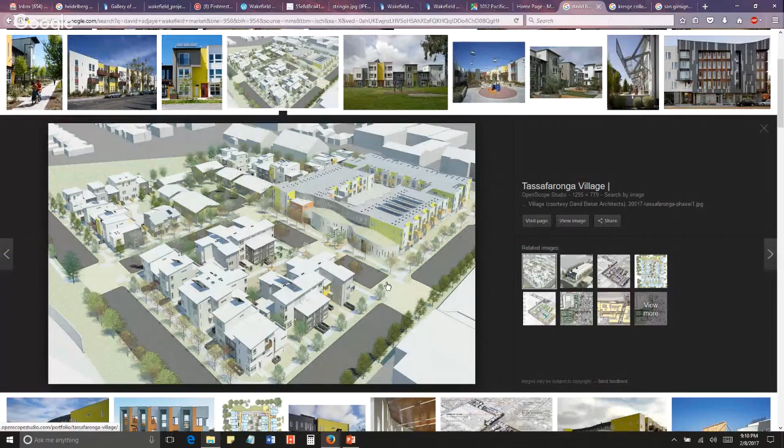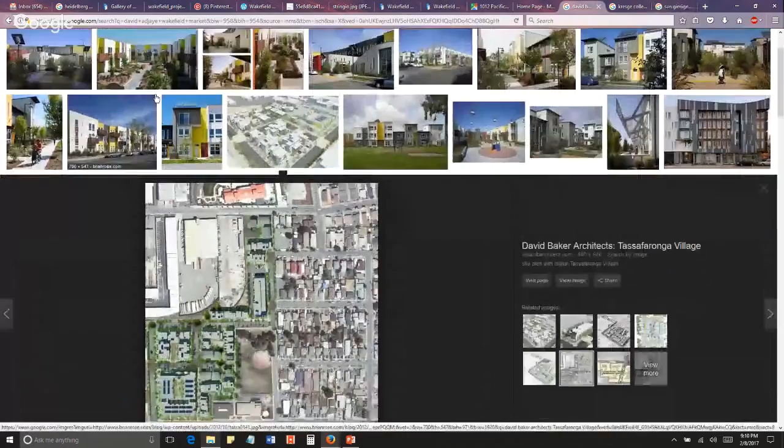So start taking the blocks like David Baker did here at Tassafaronga Village and arranging them on the site to see what they look like. Oh, by the way, go to Google Earth. Let's go to Tassafaronga. You got to do that. Copy paste that, go to Google Earth, and go to Maps. Want to open up another, so I don't lose it. Yep, brilliant.

It's in California somewhere. Oh, there it is. So then you copy that and drop it into your AutoCAD file for your site and just show what all of that, or some of that, looks like as a tool for starting. And then you can start sensing how close buildings can be, how big buildings are, and just use them as a kit of parts. That's how we design.

And blend that with the way that you design, and you'll get stronger. And I did find a neat little one. For anyone else looking to try to grab CAD files from anywhere in the world, cadmapper.com. So share that in an email with everyone, will you please, including me?

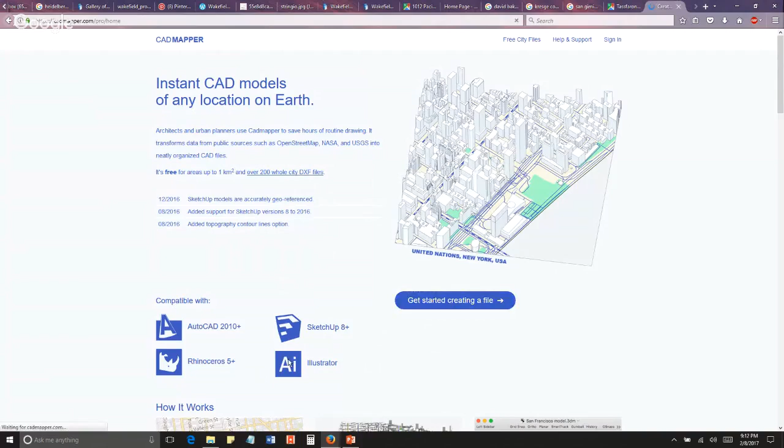So how does this work? You can grab free areas up to 1 kilometer squared, and it costs money additionally, but if you do 1 kilometer and 1 kilometer and mesh them together, it's free. But you can start creating a file, and you can essentially grab, let me try to get, which is your site, in this area is my site. And then you press, you can do AutoCAD or Rhino or SketchUp. There's no 3D buildings where I'm at, but you can do topography as well.

Get topo. I'm flat. So what it'll do is it'll create a DXF of your area, and it has all of the roads to help you create that 3D element when you go ahead and do a 3D model. Brilliant. Cadmapper, it's a Google sort of snap-on. Is that what this is? It's cadmapper.com. It seems like a Google snap-on. It does. Very cool. Yeah, that's what I spent some time over the weekend doing.

I'm glad. Because I got myself, nope, hold on, I know it's somewhere. Yeah, it's over here. I put things together to make an 11 kilometer flat one. I see. I don't have CAD loaded at the moment, but that's all right, okay, I got the point. Send me that link and send it to the others. Cool, I'll use that at work.

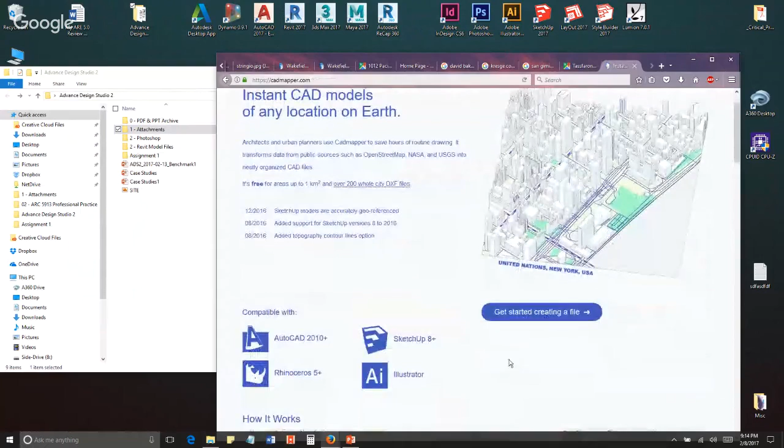So with the Google Earth, the Google 3D type thing, it also snapshots cities. Sure, that's how I see it. There's already like it shows you how it works to where you can load up buildings into the city. I'm totally excited by this because so many people come to us with this harebrained idea that they want to go do this here on this corner, and they don't have a survey. They have them already, like this. Wow.

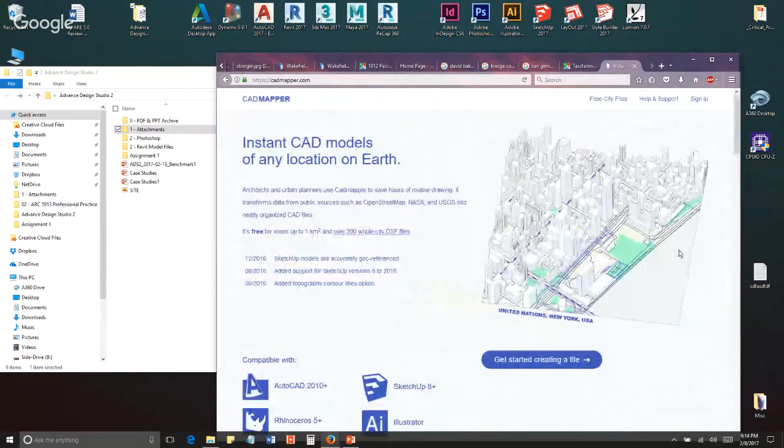That's wow, free. So, brilliant. Someone's making a lot of money off of this. Yeah, cool, thanks Heather, so I'll send that.

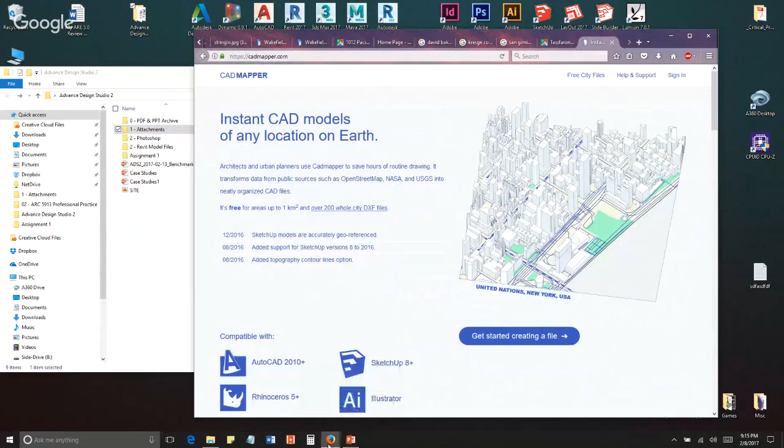For Monday, do you want to see things such as the site research? You've got two jurors potentially. One's a landscape architect who thinks and operates like an architect.

And the other is an architect in our office who is familiar with missing middle housing because he's been in our reviews before. And both of them, I assure you, know nothing about Pinckney. So you need to give everybody the full Monty in terms of the data, the information, the research that you've got.

You've got to cover a lot of things in 9 minutes, so break it into maybe three nuggets of content, 3 minutes each.

You'll be fine with this because of the way you document your research, document your content. You're so explicit in the way you share information through graphics. So yeah, you have to show them everything.